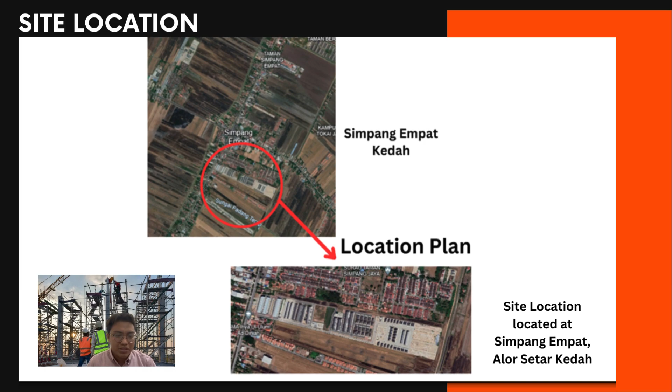Accessibility route: there are 3 routes we can use to reach this project location. The first is using Jalan Taman Impian 1. The second, if using the highway, we can exit at Pendang Toll Exit on the North-South Expressway. The third is Jalan Sungai Petani.

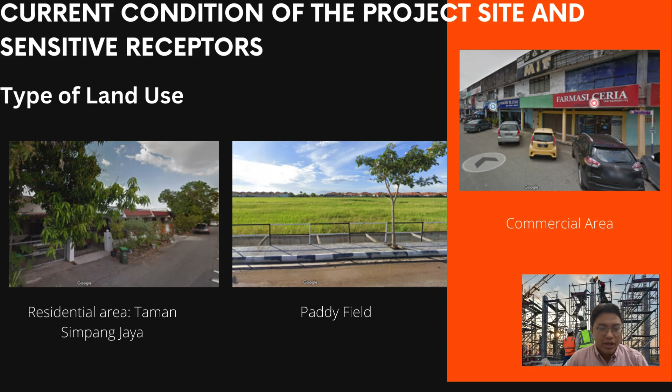Current condition of the project site and sensitive receptors. In this area, there are several types of land use. The first is residential area, for example Taman Simpang Jaya, and the next is paddy field. This area is also famous for paddy fields and commercial areas. Next type of land use is education area, for example SK Haji Hassan Hitam.

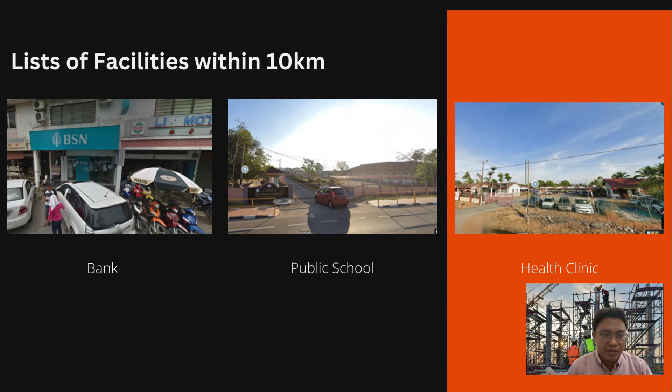Next, we discuss the list of facilities within 10 km of this project. The first is that in this area we have a bank, public school, and health clinic. The last facility within 10 km is the post department.

Next part, we discuss the project proponents and qualified persons involved in our Environmental Impact Assessment team. The first is the project leader, Muhammad Ikwan. He is responsible for reviewing Chapter 1 and also reviewing the entire EIA report.

The second is Muhammad Anik. Anik is responsible for completing Chapter 2 and Chapter 3, which are Statement of Need and Project Options.

Next is Shafiqah. Shafiqah is responsible for Chapter 4, Project Description, and also Chapter 5, Existing Environment.

Next is Shafi'i. Shafi'i is responsible for Chapter 6, Evaluation of Impacts, and Chapter 7, Mitigation Measures.

And the last one is Afiq. Afiq is responsible for Chapter 8, Environmental Management Plan (EMP), and the last, Chapter 9, Study Findings. All of the qualified persons are responsible for completing the project.

Next, we move to legal aspects. This part covers conformance of the proposed project to government development plans. The government development plan used in this project is the National Affordable Housing Policy 2019, which is Dasar Perumahan Mampu Milik Negara.

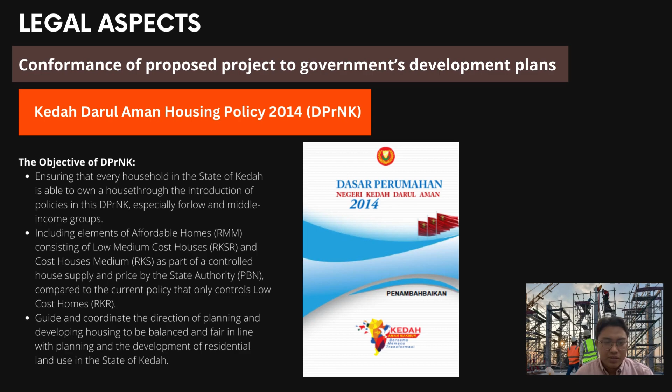Next, this project also fulfills the Kedah Darul Aman Housing Policy 2014. The objective of this policy is to ensure every household in the state of Kedah is able to own a house. The second objective includes the element of affordable housing, and the last objective is to guide and coordinate the direction of planning and developing housing to be balanced and fair. In line with this, the project follows the housing policy to construct affordable housing for all Kedah people.

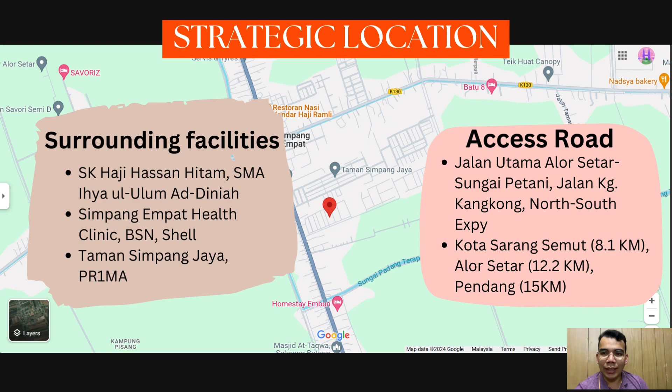The first statement of need is the project's strategic location. The surroundings include public facilities such as SK Haji Hassan Hitam school and the Simpang Empat public clinic, as well as residential areas like PR1MA Simpang Empat 2, Taman Simpang Jaya, and Taman Sayang Mari. This project can be accessed through Jalan Utama Alor Setar Sungai Petani, Jalan Kampung Kangkong, and the North-South Expressway. Nearby cities include Alor Setar City (12 km), Kota Sarang Semut (8 km), and Pendang (15 km).

Another point for the statement of need is land optimization. This project will bring a lot of people because of the many new units, and when new people come into Simpang Empat, there will surely be new business opportunities for the local community, including shop lots and offices in this project.

For environmental considerations, sadly we have to sacrifice some paddy fields to make this project successful. However, I think this is a necessary sacrifice because Alor Setar has too many people living in it, and Simpang Empat is a new city that is currently developing.

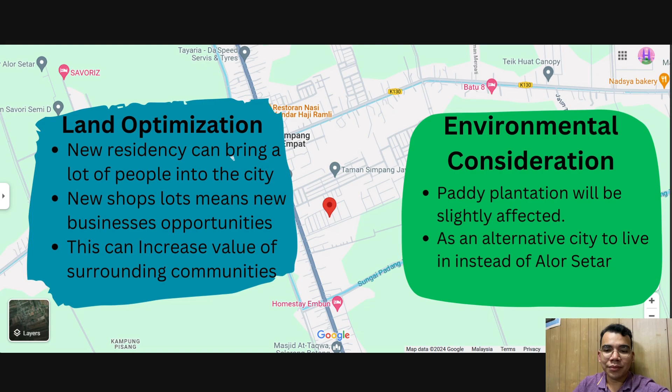In this chapter on project options, there will be a few options available to use. I will talk about their advantages and disadvantages.

The first option is the no-project option. This will surely bring a lot of impact, especially to the community at Simpang Empat. Since there is no project, there will be no low-cost houses, meaning no people will live there. This project also includes shop lots and office buildings, which would not exist under the no-project option. This means a lost opportunity for people at Simpang Empat to do business and empower themselves.

The second option is the construction method option. There are two options available: conventional method and Industrialized Building System method, also known as IBS. There is a difference between these two, and the first point I'll talk about is the process.

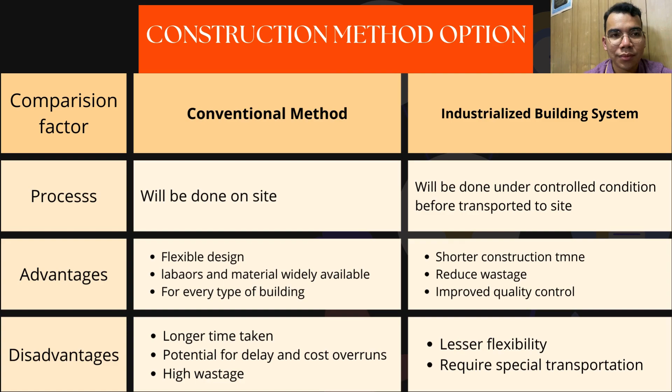For the technology option, I would consider two options: the mobile crane and the tower crane. The difference between these two is that the mobile crane is able to move around the construction site, while the tower crane stays in one place. However, it can reach all around the surroundings with its long boom.

For the lifting capacity of these cranes, it actually depends on the requested capacity by the client, so both of them can lift heavy objects depending on what's requested. For space, the outrigger for the mobile crane requires less space compared to the tower crane foundation. The tower crane foundation requires a lot of space, and the safety area also requires a lot of space.

Mobile crane is suitable for almost all types of construction. However, the tower crane is only suitable for large scale and high-rise building projects.

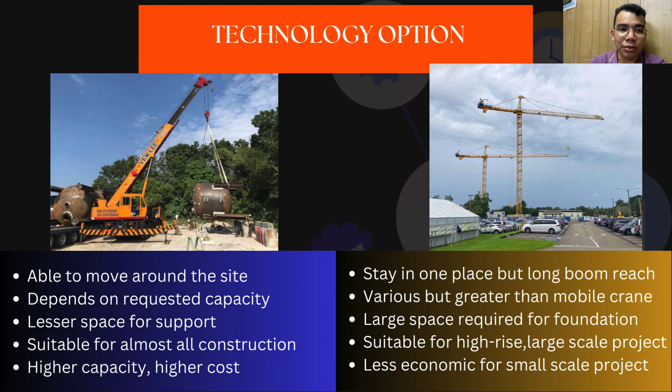From the statement of need, it seems that no project option is less relevant than continuing the proposed project.

I will talk about the factors and the difference between the no project option and the proposed project. The first factor is land use.

If there is no project, then the land will only be used as a paddy field to feed the people at Kedah.

Meanwhile, if the proposed project is done, it can bring a lot of people into the city of Simpang Empat. The second factor is income to state.

Income to state - if there is no project continued, only the paddy field activities will bring income to the state.

Meanwhile, if the project is continued along with shop lots and office buildings, new residents can surely bring a lot of business opportunity for the people at Simpang Empat.

The third factor is employment. No project option means there is only paddy field, and paddy field only requires farmers, meaning there is no job and business opportunity.

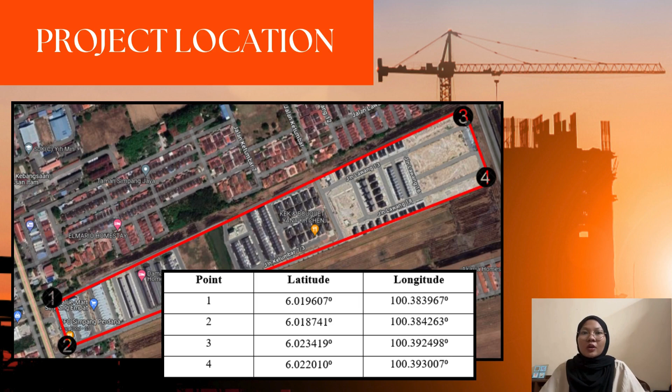This project is located in Mukim Kangkung, Bandar Simpang Empat, Daerah Kota Setar, Kedah Darul Aman. The site location is as shown in the figure, and the residential construction consists of townhouse, terrace house, bungalow, and also shop lots.

Moving on to the existing environment, the topography structure is flat without hilly terrain. Flat topography is advantageous for agricultural activities, enhancing the ease of both cultivation and irrigation.

Consequently, farmers encounter fewer challenges in managing the plantations. This simplicity extends to infrastructure development in flat areas, where the designing process for roads and drainage is less complicated.

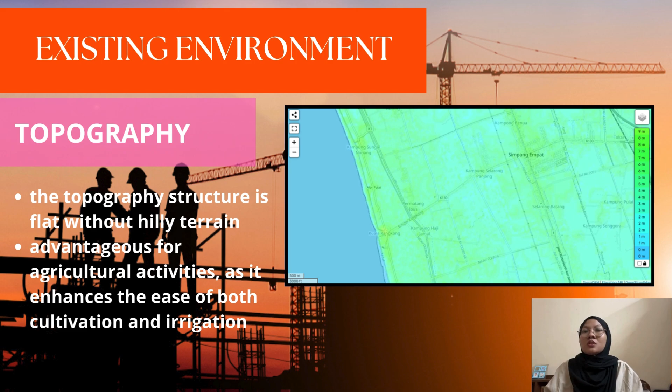Compared to hilly terrain, this scenario ultimately promotes efficiency for users in moving between regions.

According to the geological map of Peninsular Malaysia, the proposed project site comprises a combination of interbedded sedimentary and metamorphic rock.

The sediments in Kota Setar primarily consist of marine and continental deposits, which encompass clay, silt, sand, and peat with a minor amount of gravel.

They usually appear greenish to grey, but surface sediments often become light grey with yellow, orange or brown spots due to weathering. A soil investigation was conducted at the project site to assess its subsurface conditions and gather soil information for geotechnical purposes.

This information is important for the assessment and planning of the proposed structure foundation construction.

Moving on to the noise quality measurement, the noise measurements aim to assess the present ambient noise level around the proposed development, focusing on residential and sensitive areas within the surroundings.

The existing developments involved include institutions, existing residential areas, and commercial buildings. Therefore, precaution steps should be taken to manage and control noise pollution during construction work.

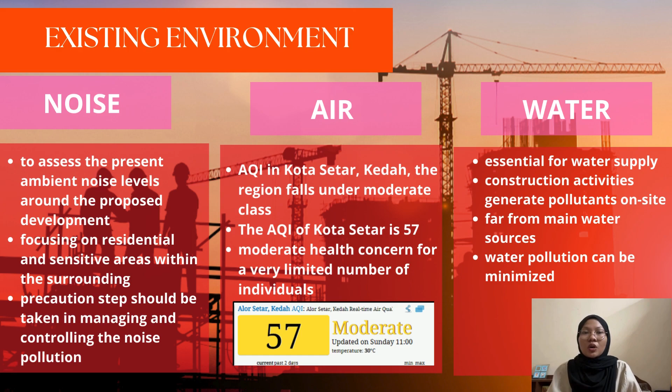For the land use of the existing environment, the location of the residential project is in Simpang Empat, Kota Setar, Kedah. Within the 5 km radius, the land use pattern is characterized by a mix of residential spaces, commercial lots, educational facilities, and areas dedicated to paddy fields. The residential project surrounded by various facilities improves the quality of life for its residents by providing a range of housing alternatives, employment possibilities, easy access to education, sustainable agriculture, and a well-planned community setting.

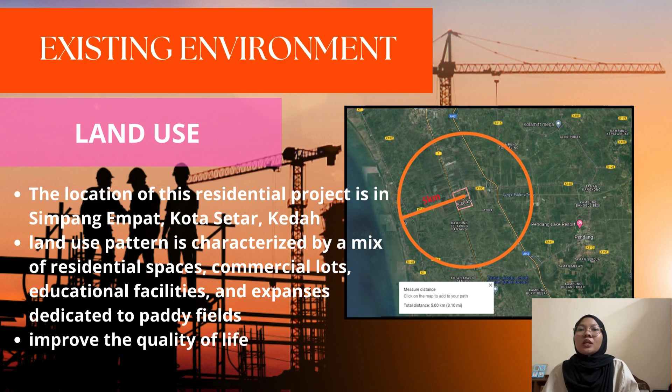That's all from me. I will pass over to Syafiq Hambali to continue the presentation.

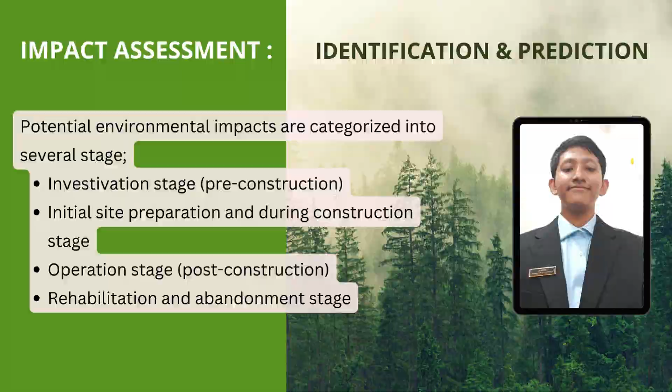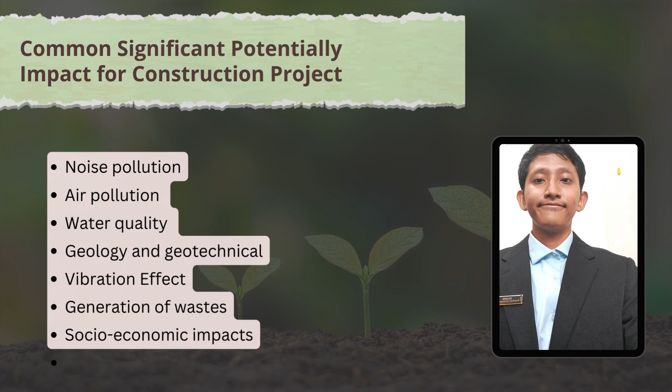For the first stage, the pre-construction or investigation stage, activities include land surveying, geotechnical or engineering surveying, and site investigations like ground explorations. The impacts can include noise disturbance from surveying and site investigation work, but this stage doesn't give significant effects on the environment compared to other stages.

For the next stage, initial site preparation and construction, activities include clearance and excavation work related to earthwork, improvement and development of access roads to the site, preparation of working platforms for construction workers, construction of haulage roads, drainage network systems, sewerage and reticulation systems, construction of sedimentation ponds, installation of construction facilities, and managing waste at the project site.

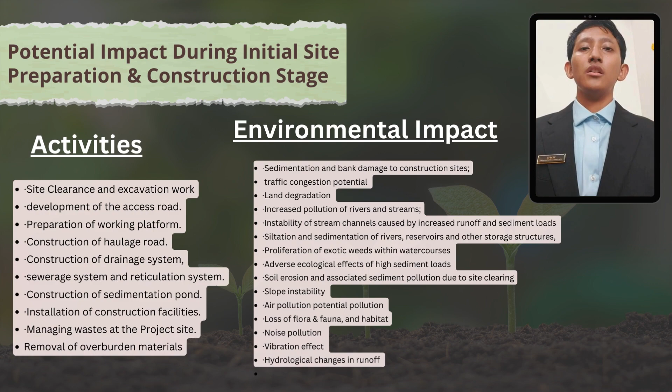This can cause hydrological change at the surface due to clearing of existing vegetation. As the soil's infiltration capacity is reduced, surface runoff increases, which can cause floods in that certain area.

There is also slope instability and topographic change from cut and fill work activity, which causes changes in slopes and gradients.

Vibration and noise effects are generated from maintenance work and from the vibrations of heavy machinery. Next is the generation of waste.

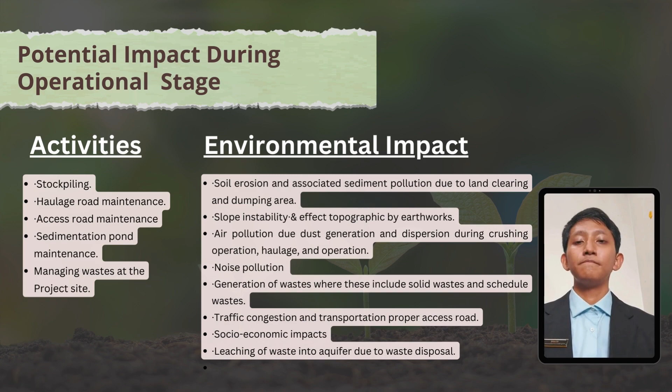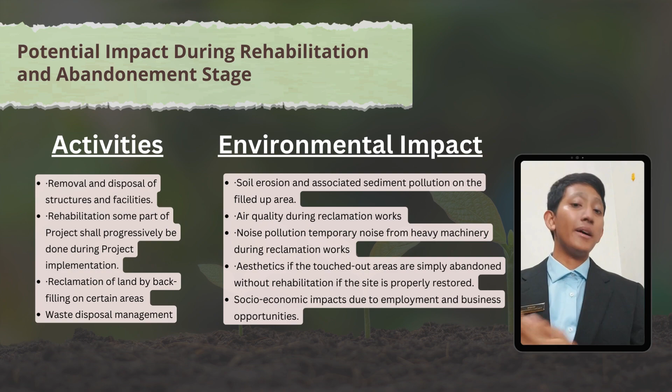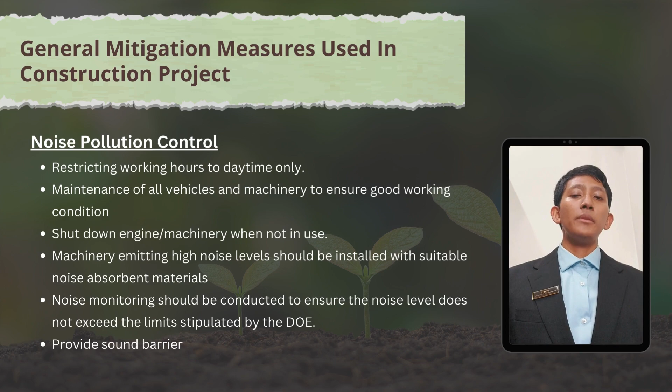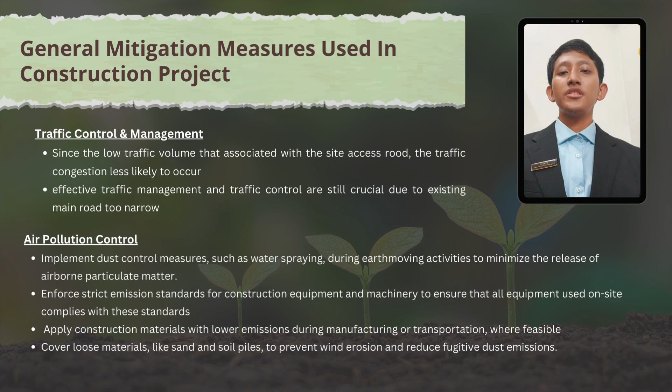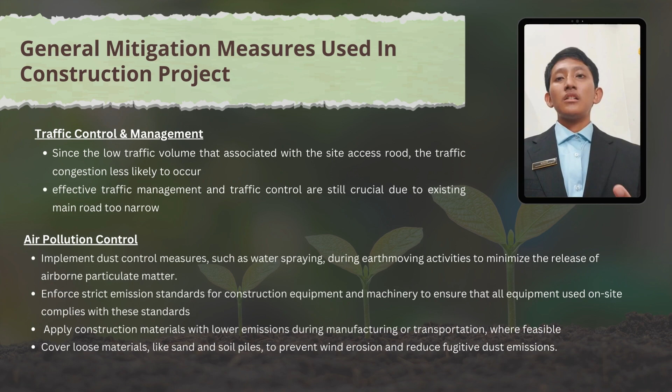Next, we can apply construction materials with lower emission rates during manufacturing or transportation. Next, we can use covers for loose materials like sand or soil piles in order to prevent wind erosion and reduce fugitive dust emissions that can cause numerous public health and other problems in the future.

Last but not least, the mitigation measures with respect to water quality and pollution control. Firstly, we can use erosion control measures and sedimentation ponds to prevent soil runoff and protect water quality from being contaminated by sedimentation.

Next, we implement a stormwater management system to manage and treat stormwater runoff from construction sites. Next, we can implement silt fences, sediment basins, and vegetation cover to prevent soil erosion and soil failure from earthwork activity and cut and fill, which can cause pollution due to sediment transport.

Next, we can establish a buffer zone between construction activity and water bodies, in order to minimize direct impacts on aquatic and marine ecosystems and to protect and preserve their natural habitats.

Next, we can design and implement an effective stormwater management system to capture and treat runoff before it enters water bodies, including the application of sedimentation ponds, as previously mentioned, and swales or permeable surfaces that comply with environmental standards, to ensure compliance with local and national environmental standards and regulations related to water quality and drinking water standards.

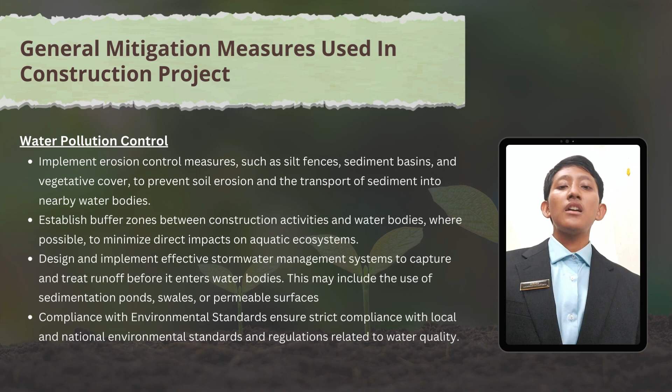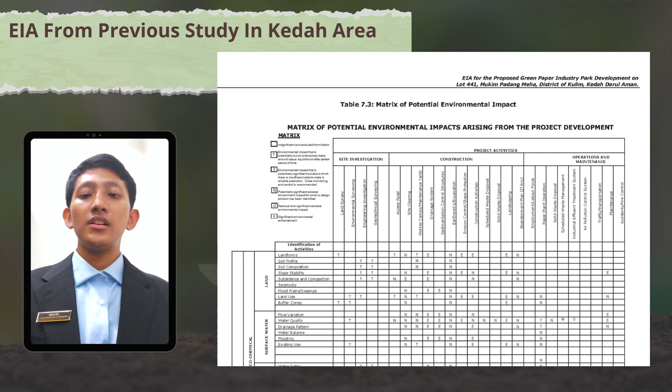The chart also shows that major construction work has caused impacts on surface water, including water quality impacts, which can cause poor and reduced water quality surrounding the construction site.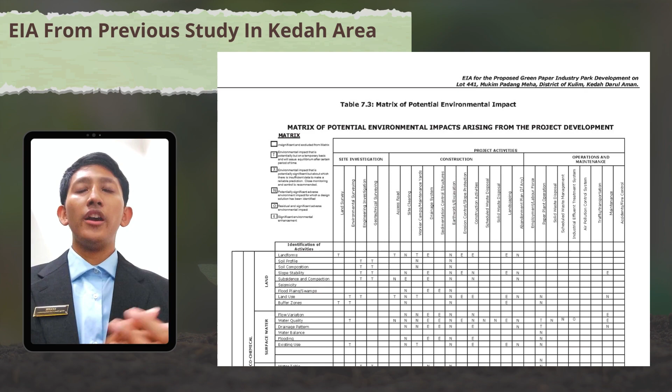The data from the report show that there's slightly significant impact on flow variation, flooding, and water balance, but it shows very high environmental impacts regarding water quality, which highlights the need for water quality management systems that prevent sedimentation or the result of soil erosion from being transported from the construction site into the existing river, which can cause pollution.

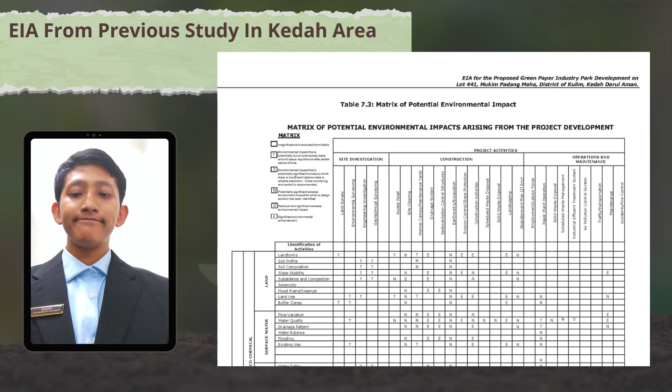Next, in terms of health and safety impact, the most concerning aspect highlighted in this report is physical safety caused by the surrounding construction area, from heavy machinery, dust pollution, particle emissions, and more. Next, in terms of socio-economy, employability is shown as the most concerning aspect compared to others within that scope, such as housing, education, utility, amenity, and properties.

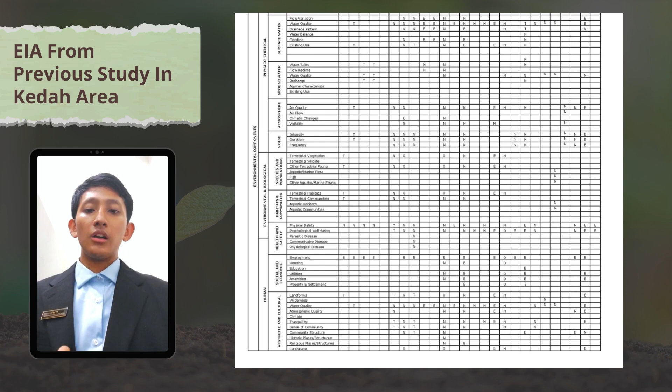Last but not least, in terms of aesthetic and cultural impact, it shows that the most significant impact is on water quality. The environmental impacts that come from the activities of the construction stage and operational stage give the highest impact on the environment in terms of water quality.

In short, the environmental impacts in the surrounding construction sites have highlighted that activities caused by construction works, such as excavation and cut and fill, can significantly impact existing lands, existing soils, and water quality, such as soil erosion and sedimentation causing pollution, river pollution, and water quality reduction.

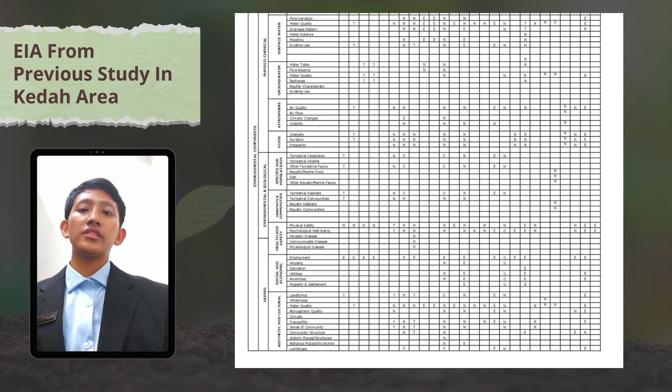This highlights the need for effective management in soil erosion control and sediment transport management systems, and also for water pollution prevention measures to prevent these existing environments from being polluted.

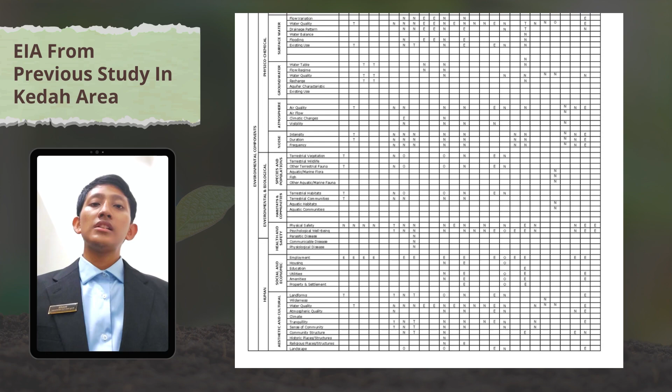That's all from me. I will pass to my friend Afix to more elaborate on the management's planning.

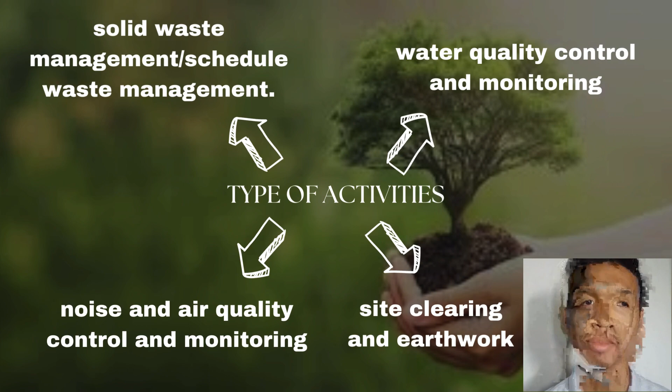Environmental Management Plan, or EMP, for the upcoming project. Our focus encompasses four distinct categories of activities, including the effective management of solid waste, vigilant control of water quality, monitoring and addressing concerns related to noise and air quality, and the meticulous execution of site clearing and earthwork. Each of these phases is crucial in ensuring the project's environmental sustainability and adherence to responsible management practices.

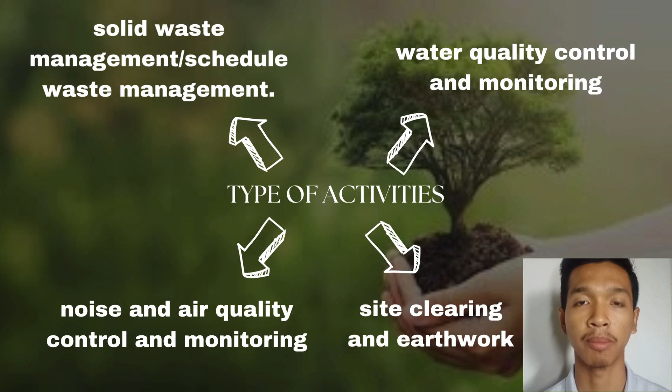The development of an Environmental Management Plan demands the establishment of a strong environmental monitoring system to track numerous environmental data at regular intervals. In our project, we have four types of monitoring programs: first, performance monitoring; secondly, compliance monitoring; next, impact monitoring; and the last one is environmental auditing.

This system functions as a quantitative feedback mechanism, delivering information on the efficiency of the proposed best management practices. Implementing an efficient EMS necessitates extensive sampling effort and the presence of individuals with the appropriate skill to properly interpret the data. In summary, the EMS is crucial to analyzing and ensuring the success of environmental conservation efforts.

Essentially, the monitoring program consists of a series of systematic techniques for measuring environmental factors on a periodic basis. The collection of on-site data for specific environmental indicators serves as a foundation for evaluating environmental performance by comparing it to baseline and compliance standards.

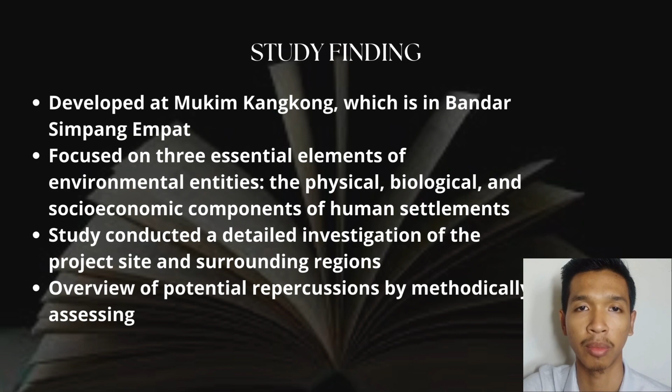The paper sought to offer a thorough overview of potential impacts by methodically assessing the project's impact on specific features. This inclusive approach goes beyond surface-level evaluation, warranting a deeper knowledge of how the project may affect the larger environment and the communities in its vicinity.